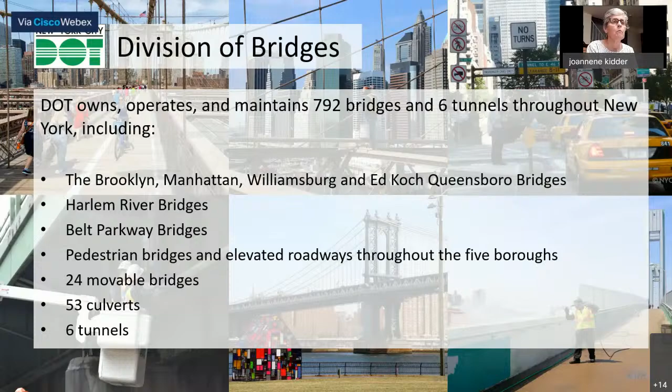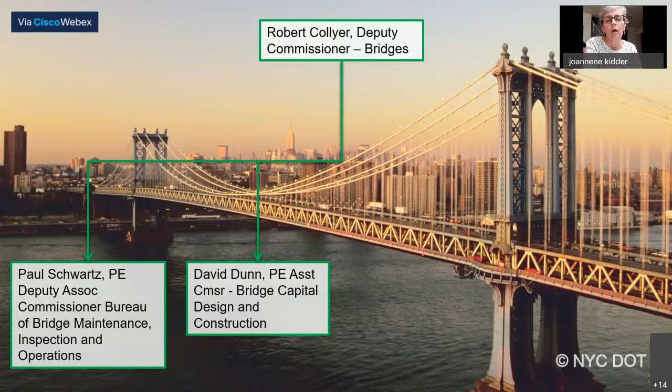This is just a global overview of the organization of the Division of Bridges, with Deputy Commissioner Collyer on top. You'll see me off to the left as the Executive Director and Chief of Staff for the division. We have 5 operating divisions. Of most interest to the Community Board, straight down, is Dave Dunn, our Bridge Capital Design and Construction Unit. You're also familiar with our Executive Director of Design, Build, and Emergency Contracts, Tanvi Pandya, who's working on the BQE and some of our emergency contracts.

So we can move on to the next slide. This is actually the information that Sean said you were most interested in.

There are somewhere around 15 or 16 individual bridges in Community District 14, and these are the bridges that are right now in our capital program.

Parkside and Ocean are together because they are physically together. We're showing them at this point moving through preliminary design, and we will be coming to you hopefully sometime this year to do a presentation on the project. That's at this point projected to go into construction in 24.

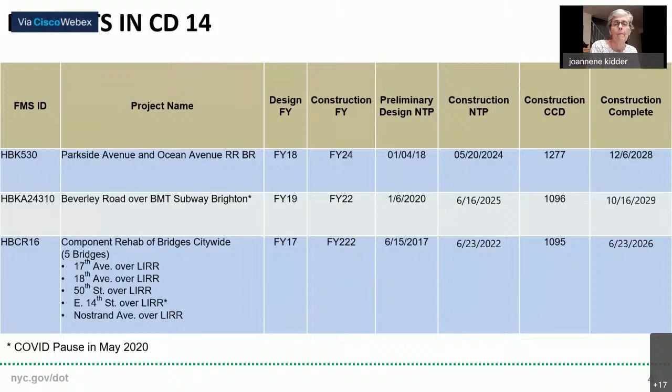We obviously were delayed last year in getting our inspection report from the state and putting the report together. So the most recent report is the one for 2019. Reports are published the year after the reports are in. So the report for 2020, we hope to bring that out sometime later this spring, get back on track.

Obviously, we stopped printing these in hard copy somewhere 8 or 10 years ago. If there's some particular reason the board would like to have a hard copy, when our print shop is back up and running full time, we'll be able to print 1 or 2 copies for you and get them to you if that's something the board would want to make use of.

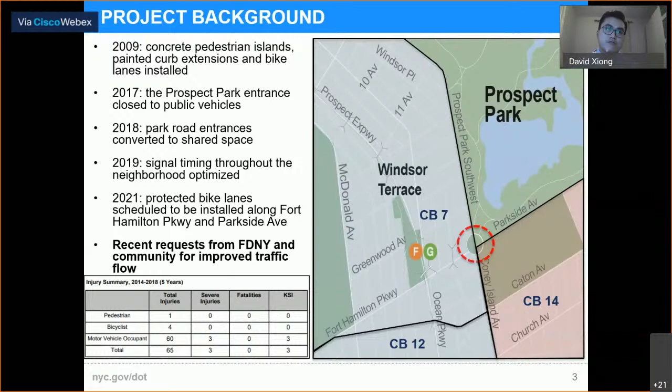Now I want to go through the conditions in the circle's current state to explain the underlying issues.

Firstly, there's a lack of clarity regarding which lanes lead to exits. There are currently no arrow markings on the ground pointing towards the exits. If you look at the circle, north of it going towards Fort Hamilton Parkway and Ocean Parkway, most cars use this red arrow path to exit. But if you look closely, it's actually the green arrow path lane that is the correct lane to exit. This isn't apparent unless you look from above and realize the red arrow doesn't lead to the exit, and it's the green one right here.

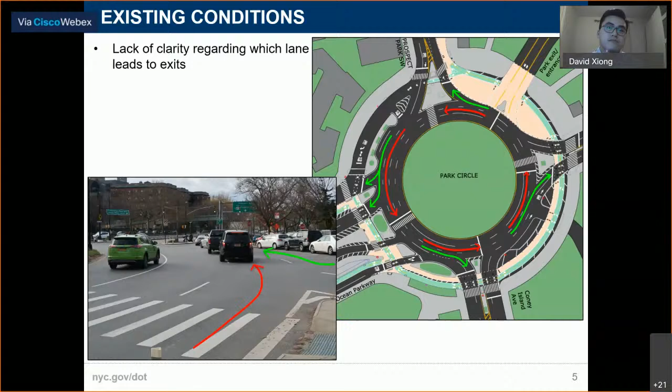Next, vehicles are required to merge into the outside lanes in order to exit, and this can lead to sideswipe collisions. Only the green arrow paths lead out, and any vehicles on the red paths must merge onto the green paths to exit. The inner two lanes, in red, only go around and around the circle, which leaves them undesirable to be in. Every car wants to be on the outside lane, and only wants to be on the inner lane for a short amount of time. You can see that pattern exhibited in the photo. The pickup truck here is in the inner lane and is getting ready to merge outward towards the exit.

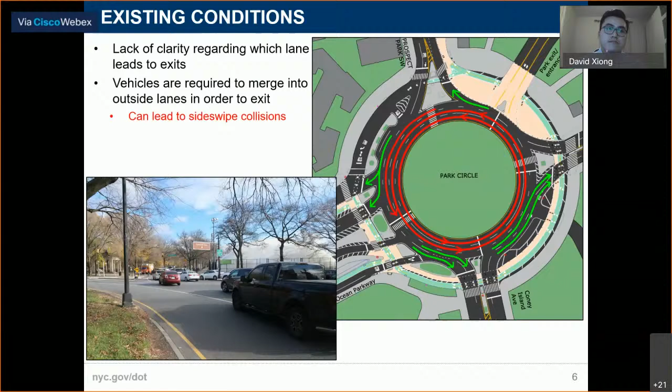Thirdly, vehicles often make multi-lane merges from the underused inner lanes, and this leads to exiting vehicles blocking other movements. At most times these inner lanes are unoccupied because, as I said, they only go around the circle. This creates a situation where a car will enter the inner lane and want to cut the line in order to exit. This is where most crashes occur. 12% of exiting vehicles going towards Fort Hamilton and Ocean Parkway take that route and cut across 3 lanes, and similarly 16% in the south cut across 3 lanes to exit. You can see in this photo that SUV is alone in that lane and is getting ready to slip in.

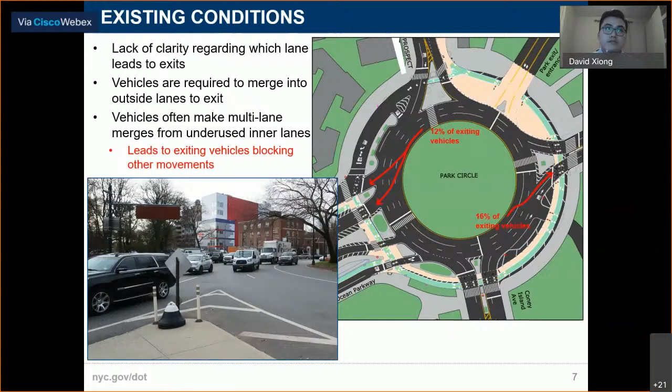Next, I want to show you the traffic pattern we typically see here at busy times. Cars are almost never in their proper lanes as they queue to exit, and they're often on top of other lanes. They also do these sudden multi-lane merges from the inner lanes, and this often causes the car in yellow, which wants to continue through the circle, to be blocked by these queuing cars. All these reasons lead to the congestion we often see here.

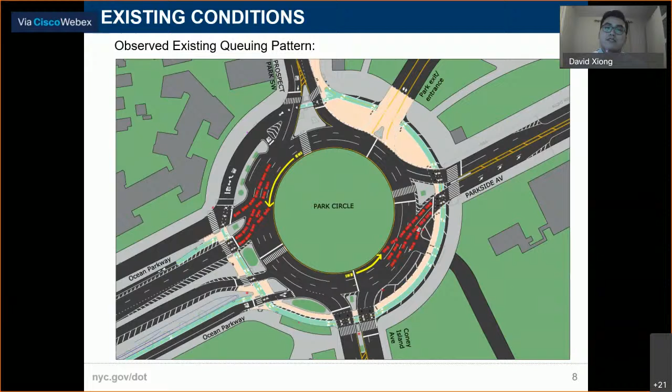Now I want to show you what we're proposing to do to address this. This project will be constructed through our in-house program by DOT staff. It consists of the following options in our in-house toolkit: exclusive turn lanes, Qwick Kurb, which are the vertical plastic barriers here, destination signs, and arrow markings.

Going into our design, our major change is to reconfigure the lanes so that all lanes lead to an eventual exit. The inner lanes no longer go continuously around the circle, so they serve more of a purpose. This also reduces lane changes, which is a major cause of crashes here, and creates shorter queue lengths by better dividing traffic between the lanes.

Second, we're proposing to increase the markings and signage to guide vehicles to the correct lane and exit. As you saw before, there were no arrow markings throughout the circle; we're proposing to increase that dramatically. This informs drivers where to be much more in advance, and by doing that we can balance the cars in each lane so it prevents vehicles wanting to go one direction from blocking a vehicle that wants to go another direction.

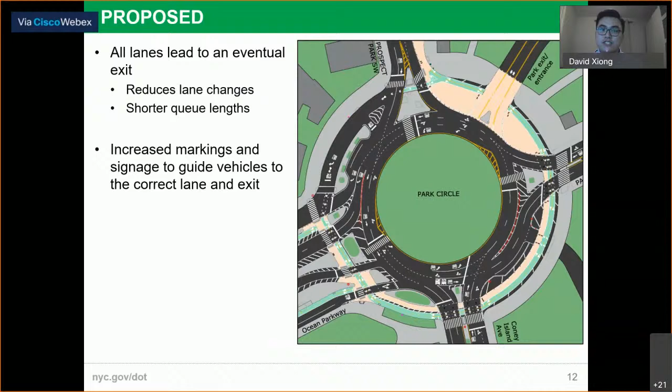Third, we're proposing to install Qwick Kurb near major exits to prevent those vehicles from performing multi-lane merges. It enforces vehicles to go into the correct lane and again reduces merges and prevents crashes.

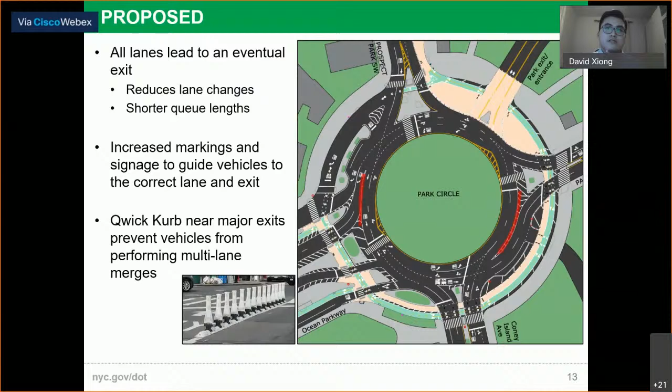Now I want to show you how cars will queue in this new design compared to the existing. I've shown you this before, just note that the number of cars in each diagram are exactly the same.

So we're no longer seeing that the cars continuing through the circle are being blocked. And the Qwick Kurb enforces cars to line up properly and move them to the outward lanes.

Lastly, I want to analyze a major existing route taken through the circle and see how it compares to this new design. A huge portion of cars throughout the day drive into the circle at Coney Island Avenue and exit at Fort Hamilton Parkway. So, following the red path, we enter the inner lane because we see it's mostly empty, and we know we're going to be in the circle for a while as we're exiting on the last exit.

Excuse me, Joel, do you mean coming into Coney Island from Coney Island and going to the highway, not Fort Hamilton? A lot of cars go from Coney Island Avenue around the circle and into the highway. I believe that's the exit above it, right? The highway is when you come around the circle, 3/4 of the way around, you go to the right to go to the highway. To go to Fort Hamilton, slightly to the left. Yes, I think a lot of those cars from Coney Island are going to the highway. Well, there's actually a high volume of both, but in this example, we're showing for Fort Hamilton.

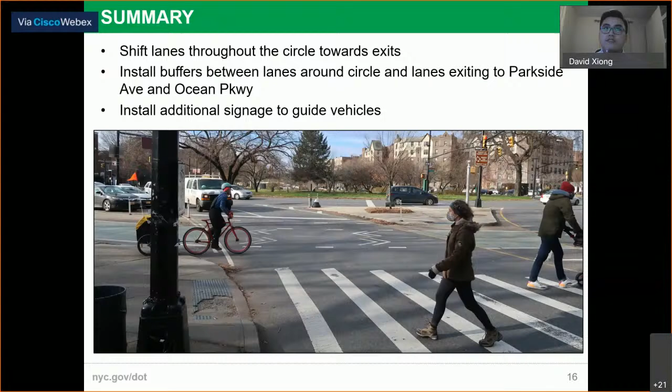So in summary, we're shifting lanes throughout the circle towards the exits. We're installing buffers between the lanes around the circle and lanes exiting to Parkside Ave and Ocean Parkway. And we're installing additional signage to guide vehicles. The benefits are that we're making simpler, safer vehicular movements, reducing weaving for vehicles exiting the circle, and improving vehicular movement.

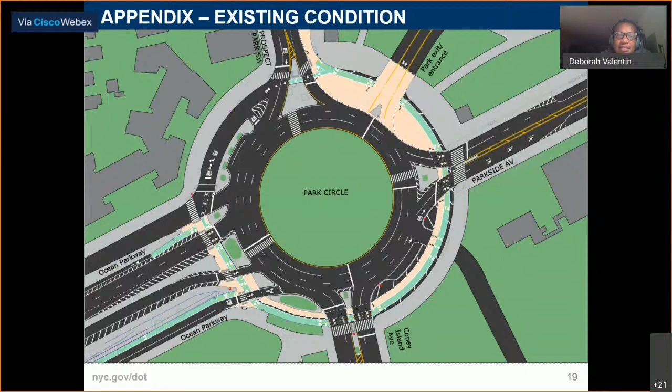Yeah, I always drive this circle, and I always get confused when I come towards the Prospect Park Southwest exit, and I feel like the sidewalk here is out too much. It could have been pushed back a little bit, because once you come around from, say, Coney Island Avenue, you get a little congested here before you go to the Parkside exit. And then when you turn, it's kind of a funny corner trying to get to Prospect Park Southwest. Is there anything that can be done to alleviate that little stress in that space right there?

Okay, so what you're probably experiencing as you're coming from Coney Island Avenue is you're entering the inner lane here, and then you're getting blocked by these cars trying to exit at Parkside Avenue. No, it's not necessary, I'm not being blocked, it's just the way the side of the road is situated. It's like you go in and then have to come back out to go back out.

I think part of the problem, Deborah, maybe you'll agree, is when you're trying to get to Park Slope via Prospect Park Southwest, you're blocked by cars that want to go around either to the highway, Fort Hamilton, or back to Coney Island. You're blocked by those cars, and the sequencing of the lights creates congestion for everybody.

No, it's not the congestion. I think it's the piece of sidewalk or buffer, the small pedestrian island in between, where you have to try to position your car. That space in between is small and awkward.